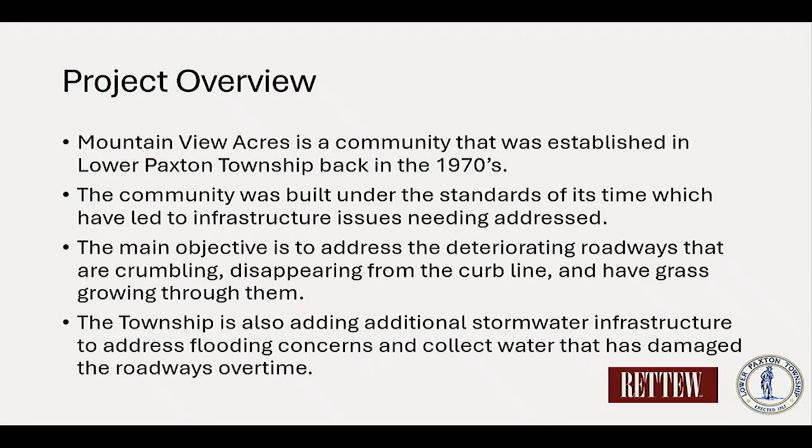The project team, of course, always consists of the property owners, the Board of Supervisors, and the Sewer Authority Board, as they are providing the funding towards the storm part of this project. Township Manager Michael Gossert, as well as the Department of Public Works and its Utilities Division staff. Matthew Jarolowski is the Director of Public Works. William Weaver is the outgoing Director of Sewer. Kevin Fleck is the Deputy Director, along with Deputy Director Eric Morgan.

Kyle Heiner is the Construction Division Manager in charge of all the construction progress. Eric Kimmel is our Road Technician. Phil Daniker is our Construction Crew Leader. And Michelle Kwasnowski is the sewer administration staff. Also part of the engineering team, we have the Department of Engineering consisting of Melissa Smith, PE, our director. Myself, Larry Stepanski, the staff engineer. Robert Hayes, our GIS manager. And the consulting engineer who designed the project was RETTEW. Mike Naus, PE, is the project manager in charge of the design part of this project.

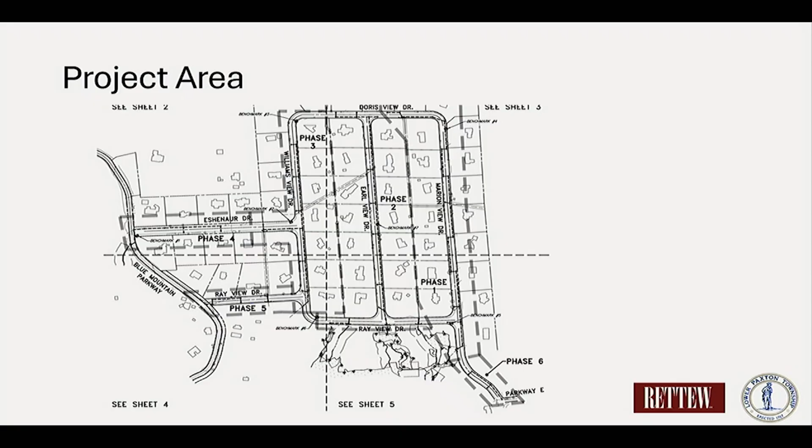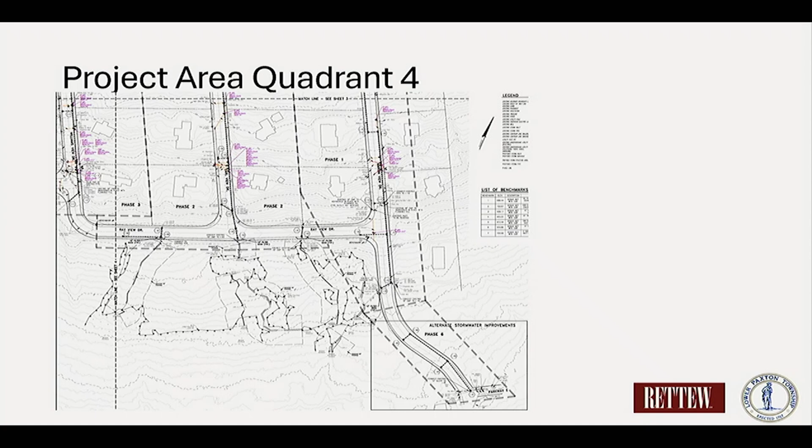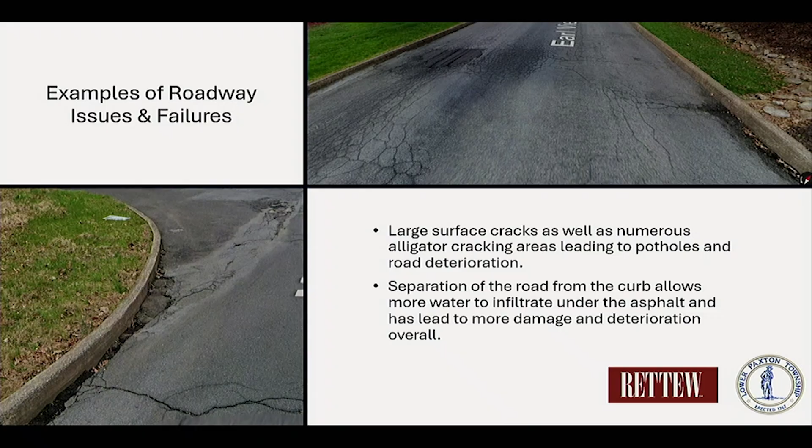So some examples of what led to this project are the roadway issues and failures. As you'll see from some of these photos, you can see the large surface cracks as well as numerous alligator cracking areas leading to potholes and road deterioration. You'll also see in the bottom left picture the separation of the roadway from the curb in areas, allowing for way more water to infiltrate under the asphalt, which is leading to more damage and deterioration overall.

You also see some pictures here of some of our existing stormwater issues. There is a minimal amount of existing stormwater in this area, and that infrastructure is currently in disrepair. The corrugated metal pipe that was placed back in the day has begun rusting to the point where no bottoms are left in the pipe. Some of the pipe has also become crushed and cannot convey the same capacity as originally intended, and this limited stormwater facility has created freezing and flooding issues within the neighborhood.

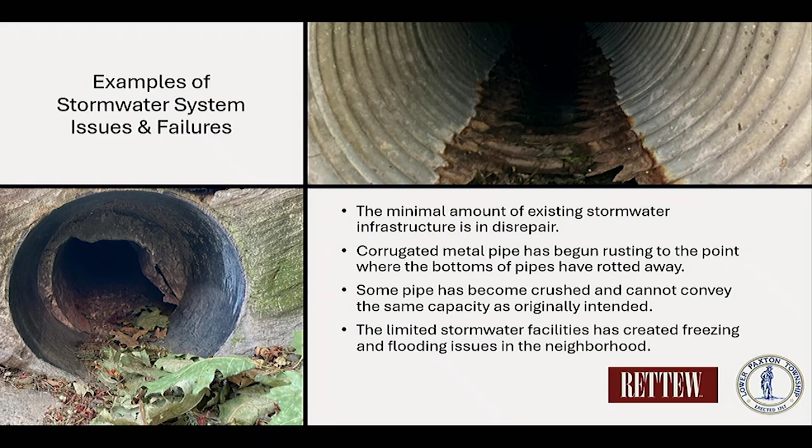The construction scope. Crews will be removing the existing stormwater facilities and installing new facilities and structures in the roadways of the development. Anything outside the roadway really isn't being touched in this project. It will only take place in the township right-of-ways. The majority of the work will be occurring on the following streets: Blue Mountain Parkway, Eshenaur Road, Ray View Drive, Williams View Drive, Doris View Drive, Earlview Drive, Marionview Drive, and Parkway East.

Most of the work will take place within the township's right-of-way and existing paved roadways. In some situations, the township will need to excavate behind the curb in order to install inlets or reconnect existing piping. Even in these instances, all work will remain within existing township right-of-ways.

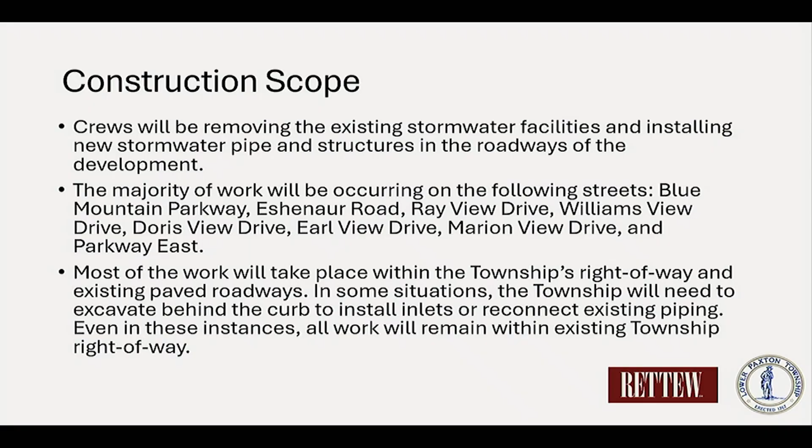Construction phases map. As stated earlier with the design, the construction phases will be broken into 6 phases. Just want to make note that the storm sewer design drawings that were posted in this picture will also be posted on the township website for any residents interested in reviewing them for their specific detail.

The 6 individual phases are color-coded. Phase 1 is in red, Phase 2 is in blue, Phase 3 is in green. That will cover the majority of the project going across Mountain View Acres. Phase 4 is there in purple, the upper road. Phase 5 in orange, the lower road. And Phase 6, which is an alternate phase, will occur down along Parkway East.

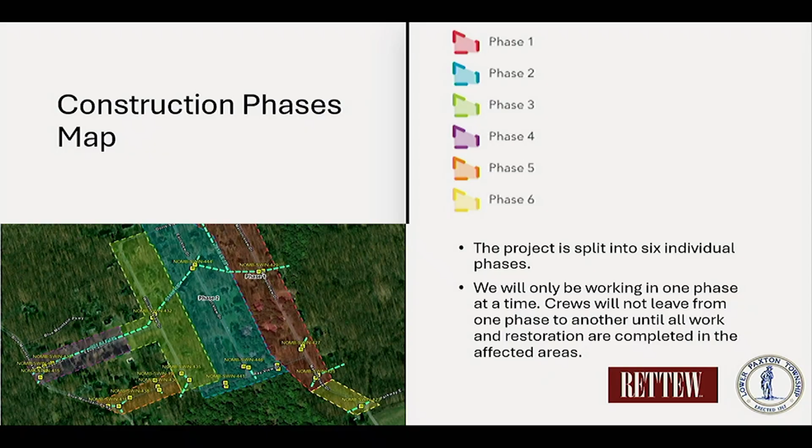Each phase is expected to take on average 90 days to complete, subject to construction delays and weather throughout the year. You'll see that some structures have already been delivered to the Mountain View Acres to begin Phase 1. Construction should be starting here within the next month or so. Then you'll see it takes about 90 days from there for each project to be able to take on.

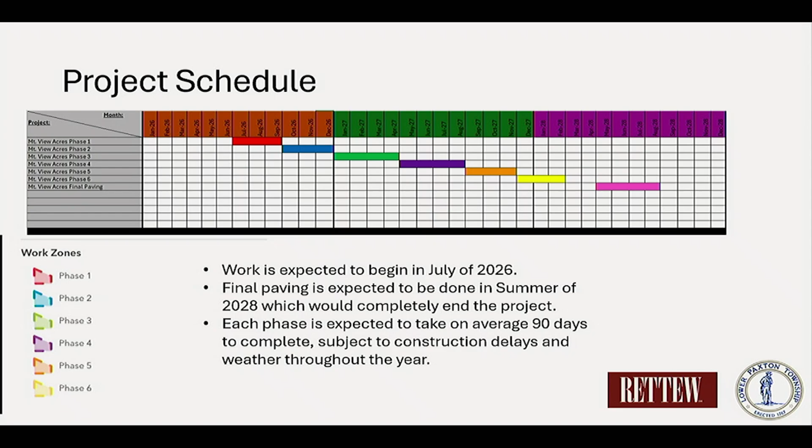Some impacts that will be occurring to the residents. Limited access to driveways during construction times. Our working hours are 7 a.m. to 4 p.m. on a Monday through Friday basis. Most of the construction will take place in the public streets. There will be times crews will dig past driveways. In such events, we will notify you ahead of time so you can arrange to leave your car parked elsewhere, or we can organize a way to get you out of your driveway if we are digging across it.

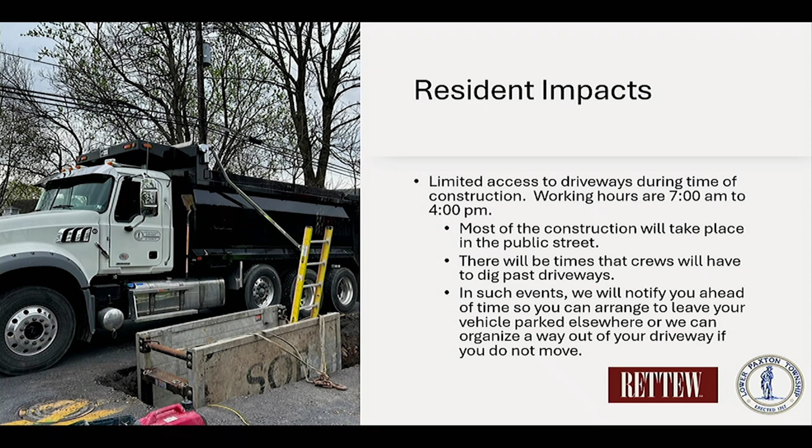Some more residential impacts can consist of construction noise and equipment activity. You'll see in the pictures, this is some of the equipment that will be present on the street in order to accomplish this project. Construction is a noisy and dirty process. You can expect loud bangs to be heard from the machines digging and trucks moving around, beeping noises from vehicles in reverse, shouting from workers to be able to talk over the loud equipment and request materials.

You will also notice the roadway is being dug up, which will lead to dirt, stone, and dust in the roadways. Crews will make all efforts to keep dust and dirt to a minimum by periodically cleaning the streets, but there will be times that dirt and dust is present between cleanings.

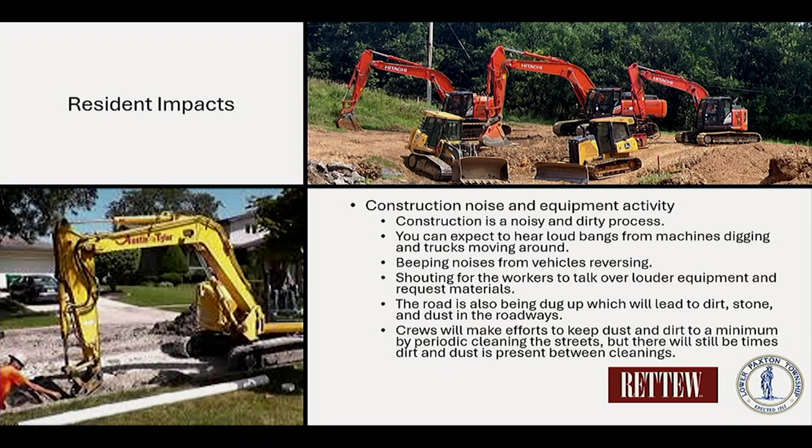Other residential impacts will include intermittent traffic restrictions and lane closures. When digging up the roads, there will be closures and detours set in place. Closures are required to keep the public safe from being in areas of heavy equipment and open trenches. It is also meant to keep our construction workers safe from traveling vehicles.

Anytime a roadway is closed, there will be a detour set up to get around these areas. We ask that you be patient and follow the proper signage. Arrangements will always be made for any buses, emergency vehicles, mail, and trash services to be able to access homes as necessary within the closure.

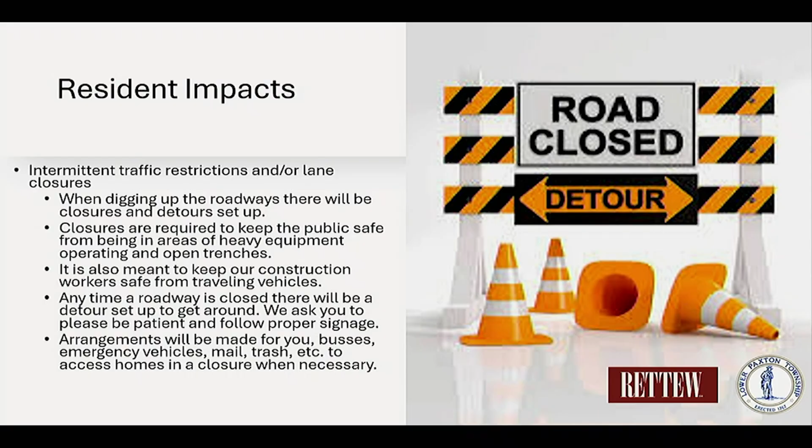In order to stay informed, we do have public information periodically. The township will provide residents with project info. Bi-weekly updates can be found on the Lower Paxton at Work website, and any major changes will be sent out via a letter for public notice on top of our website and social media updates as we move forward with this project.

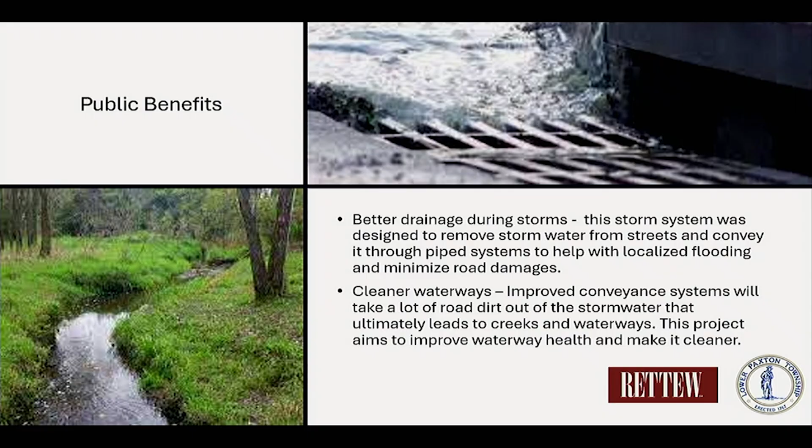Some of the benefits that will come from this project to the public include better drainage during storms. This storm system was designed to remove stormwater from streets and convey it through pipe systems to help with localized flooding and minimize road damage. This will also lead to cleaner waterways, as improved conveyance in the systems will take a lot of the road dirt out of the stormwater that ultimately leads to creeks and waterways. This project aims to improve the waterway health and make it cleaner.

Some other benefits include reduced flooding. Areas with localized flooding concern or icing issues in the wintertime were targeted through the survey in order to minimize these safety concerns from repeatedly occurring in the future. Improved road surfaces. Final paving restoration will provide a nice new roadway to the neighborhood, and improved drainage will improve the longevity of the new roadway.